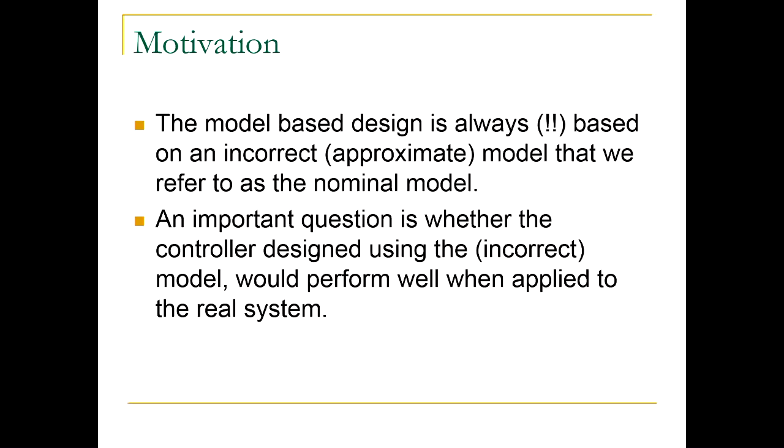The only thing we know is the model, right? So you do the best you can to make the model as good as possible, as high fidelity or as useful as possible. But then your design is solely based on the model. And when you implement it on the true plant, the question is, would it still work? That leads to the question of robustness. How much perturbation in the plant can you cope with before you lose stability? And the other question is, how does perturbation affect your performance? This is a question of robust performance. Both questions are addressed in this lecture.

So here is the general setting that we are dealing with in this lecture. First you have a model. This nominal transfer function is your model, and you design controller C based on the model. But then the question is, how will the same controller perform on the real system? When I use the same controller on the true system, now I have the actual transfer function G. So note that G, the actual transfer function for the true system, is different from the model. Always. You can never expect them to be the same.

I mean, this is still under the assumption that the true system can be described by some transfer function, that the model is linear. But in general, the model is actually non-linear, so there will be even more perturbations, non-linear perturbations, that cannot be captured by just transfer functions. In this lecture, however, we concentrate only on the case when the plant is assumed to be linear, so it can be modeled by some transfer function, and the model is also linear, right?

But more generally, you can pose a question of robustness when the plant is non-linear. We won't address that in this lecture. All right, so the first thing is, how do I model the mismatch between G and G0? You can do it in different ways mathematically, and each different way may have its own advantages in terms of analysis and design.

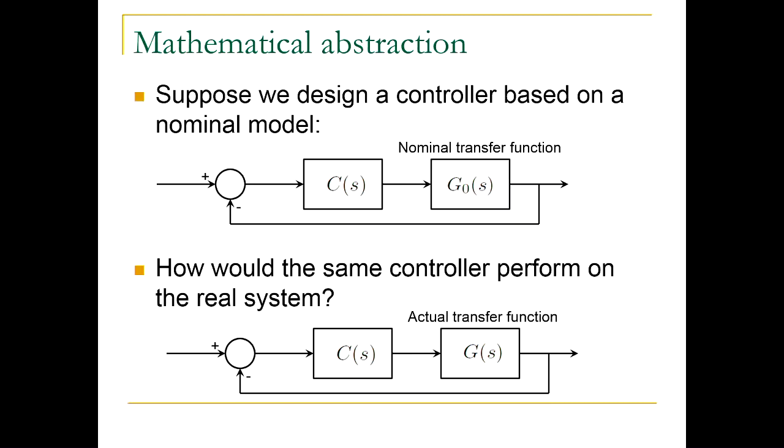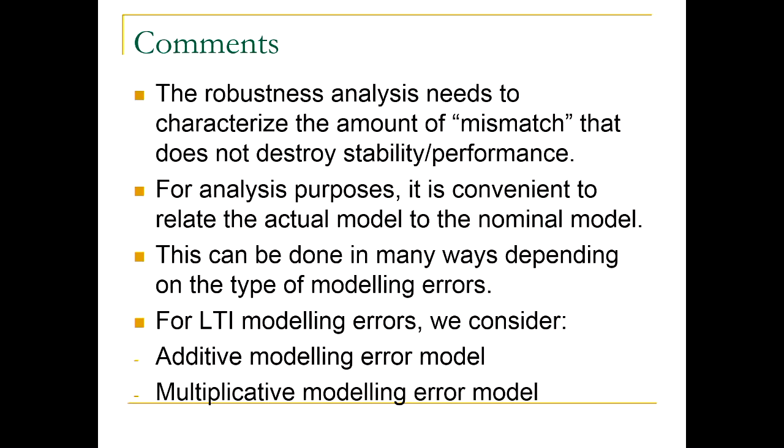So what we want to characterize in robustness analysis is how much different G can be from G0 before it loses the stability properties and performance that we wanted. So we will relate this actual model to the nominal model, and it can be done in different ways depending on the type of modeling errors. For linear time invariant modeling errors, we consider additive and multiplicative modeling error models, and we will go through both. So first, I will present an example.

So when you buy a resistor, you go to a shop and you buy, say, a 100 ohm resistor. But when you read the specifications, the manufacturer would guarantee that resistance is in some range. They would never sell you a resistor which is exactly 100 ohm. What they guarantee is that resistance will be somewhere in the range between 99 and 101.

For instance, it's common to say, well, on average, resistance would be 100 ohms, so I will use 100 ohm as my nominal model for this resistor. But the true model is anywhere between 99 and 101. In other words, the error between the two is plus minus 1 ohm. Now, when you're designing systems, your system might be an electrical circuit that consists of lots of capacitances, resistances, inductances, and each of these elements may have its own errors that you need to cope with.

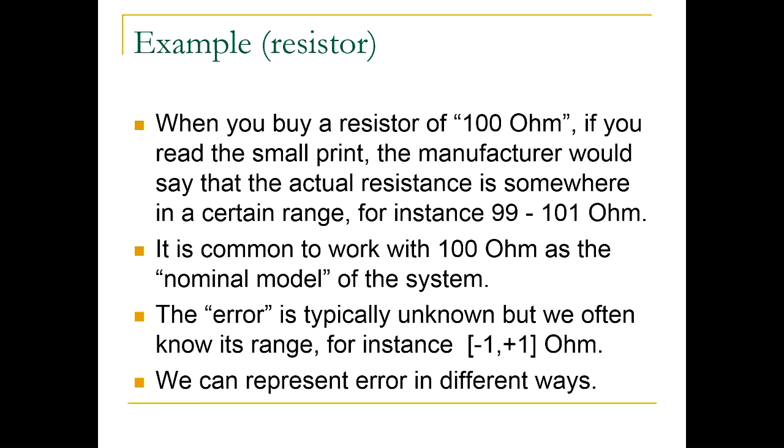So typically you would use the nominal value that the manufacturer tells you, and then you would still need to cope with this uncertainty, which, if the manufacturer is good, they would guarantee, and the errors would be within this range. So now we want to talk about how we represent these errors in different ways. We will present two ways of doing it.

I have a resistor with resistance R, and R0 is the nominal resistance. So think of R0 as 100 ohm, and R is some unknown resistance in this interval between 99 and 101. One simple way to represent it is R = R0 + R epsilon. This is sometimes called the additive error model. Now you may say, well, that's probably enough.

Well, it turns out that in many control analysis and design techniques, it's also useful to represent this error in this way: the true resistance is R0, the nominal resistance, times 1 plus R delta, where R delta is the amount of multiplicative error. It's just a different way of doing it. I presented both the formulas and block diagrams for additive and multiplicative errors for the simple case of resistance.

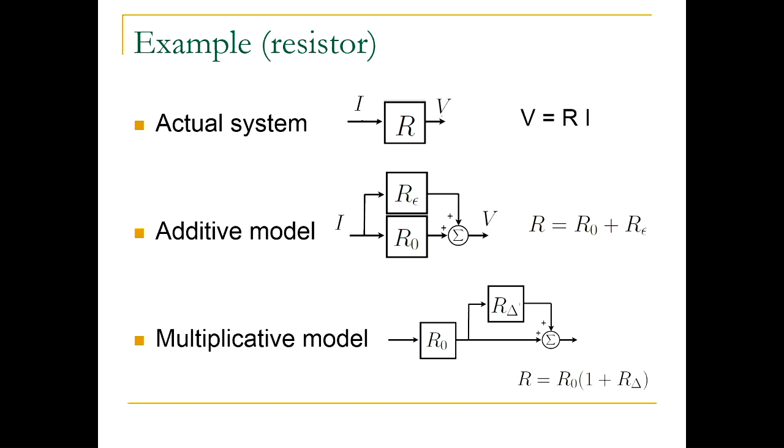But you can generalize the same thing when instead of R, you have a more general transfer function G(s) and G0(s). So R will be G(s) and R0 will be G0(s). You can represent any arbitrary transfer function, not just static models like this one with no dynamics. Then the additive error would be representing the true transfer function G as G0 plus G epsilon. Coming from the resistor example, it's clear where this formula comes from.

And you can also represent it using multiplicative error, where now your true transfer function is G0 times 1 plus G delta, where G delta is the amount of multiplicative error. You may ask, why both? As I said, different techniques might benefit from one or the other.

So we won't actually go into details, but I just want to give you these examples simply so that you are aware of it. It's useful to also consider a couple of relationships. So if you just look at the algebraic equations for G epsilon and G delta, you will see that G epsilon is just G delta times G0, and also in the resistor example, this is easily checked. Right? So there is a relationship between multiplicative error R delta and additive error R epsilon.

We will now go through several examples. What I want to do is present more complicated examples than this. This is very simple because the system is static. But I want to present you examples when you have some transfer functions really, and I will plot Bode diagrams for various transfer functions, in particular G epsilon and G delta, for a range of different examples, just so that you get some intuition behind how general these things can be, right? Depending on the system, these things can become quite general.

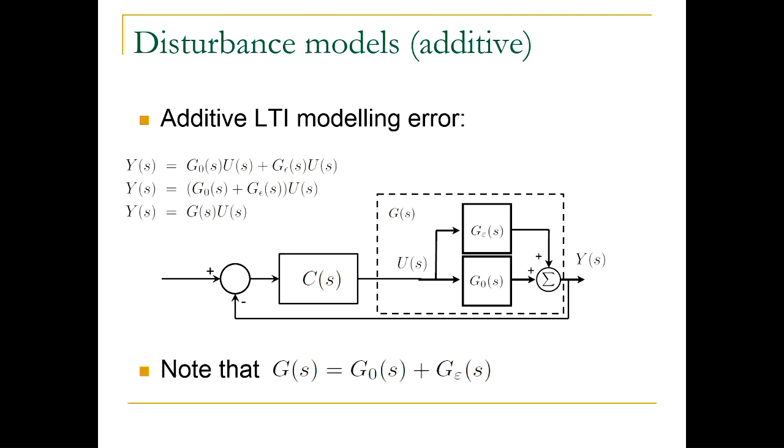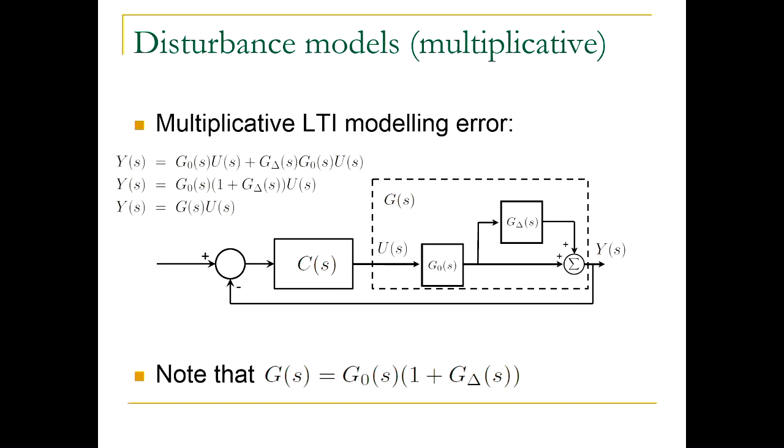You need to basically be able to stabilize the system, right? So the idea is, I just want to go back so that you understand what we are doing here. Suppose I stabilize this system when G delta was 0. Now the question is, when G delta has some of these characteristics, like G delta 1 or G delta 2 magnitude characteristics, would I still be stable? That would be the question we would be asking. And the small gain theorem would answer this question for us.

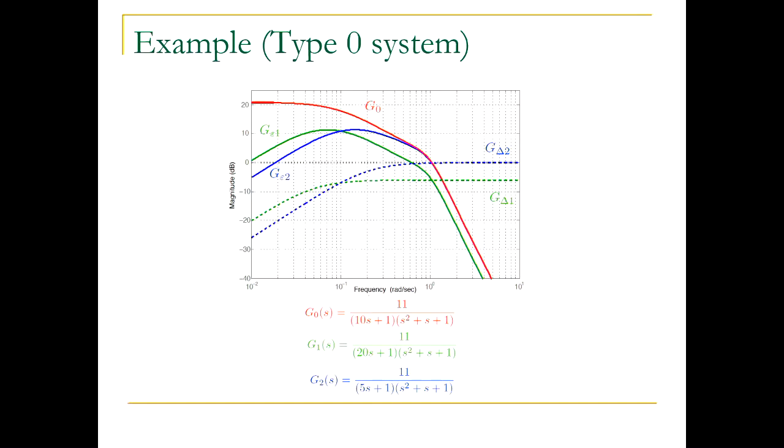Once we present the small gain theorem, you will be able to relate which ones of these can be coped with and which ones cannot be coped with. We cannot conclude if you cannot cope with it. The small gain theorem is a sufficient condition. So if the small gain condition does not hold, you might still have stability, right? But you can definitely pick out the ones that you can cope with.

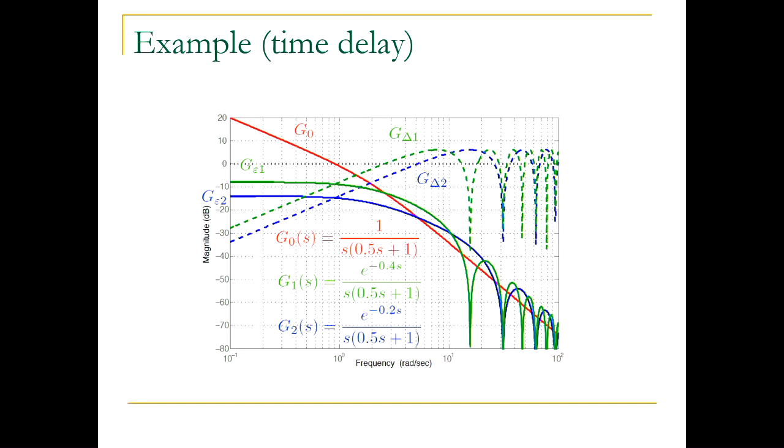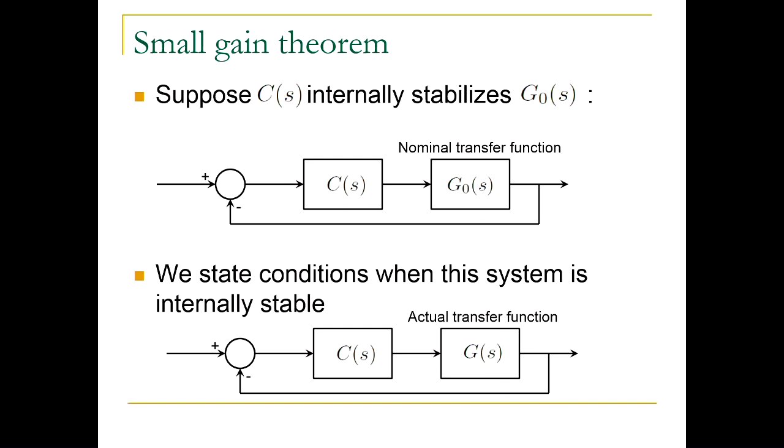What we will assume is that both lambda 0 and lambda have the same number of right half plane poles. So open loop transfer functions have the same number of unstable poles. You can achieve this when either G epsilon or G delta are stable. When they are stable, this condition would hold. Can you see that? What are the poles of G versus G0? Well, this one would have poles which are the union of that one and that one. So if G epsilon is stable, then we are not adding any unstable poles for the plant.

Obviously the controller is the same; the controller doesn't change anything. The only difference in the number of poles can come from the difference in the plant models between G0 and G. So this is an assumption we'll use. Can everyone see this? So if G epsilon is stable, and G0 has a certain number of unstable poles, let's say 5, then if this is stable, this would also have 5 unstable poles.

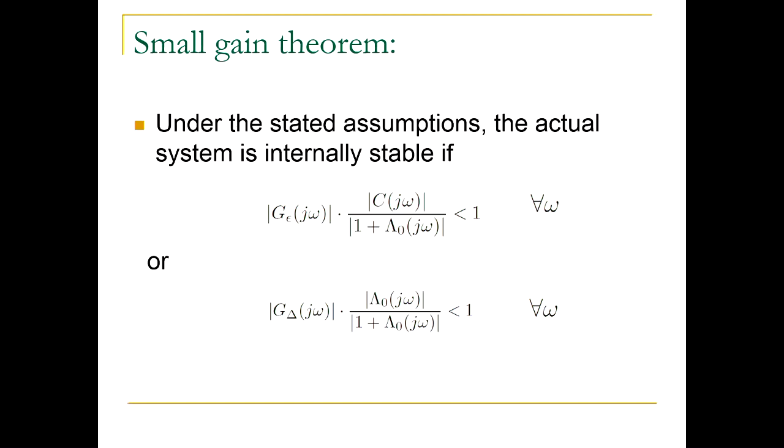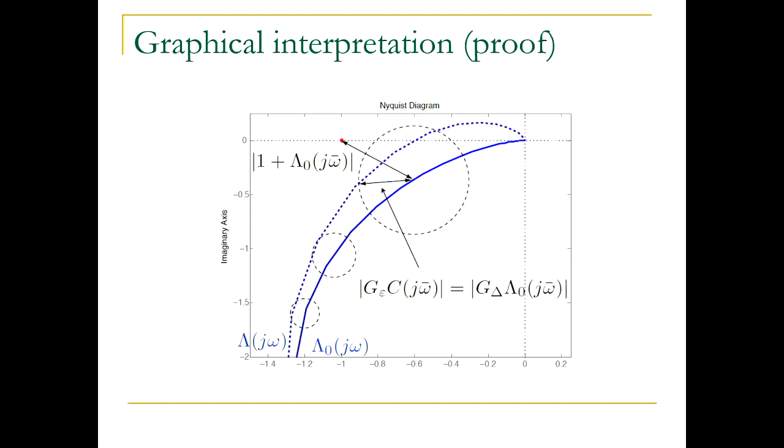So note that here we only use the magnitude information to conclude stability, but in general, phase also affects things. So this is a sufficient condition. Still very powerful, right? So just a few comments which I already mentioned. The small gain condition ensures that the number of encirclements of the critical point (-1, j0) by the nominal Nyquist plot does not change when the Nyquist plot is perturbed by the modeling error. In other words, you have the same number of encirclements for the true system's Nyquist plot and for the nominal system's Nyquist plot. It's only sufficient and potentially conservative.

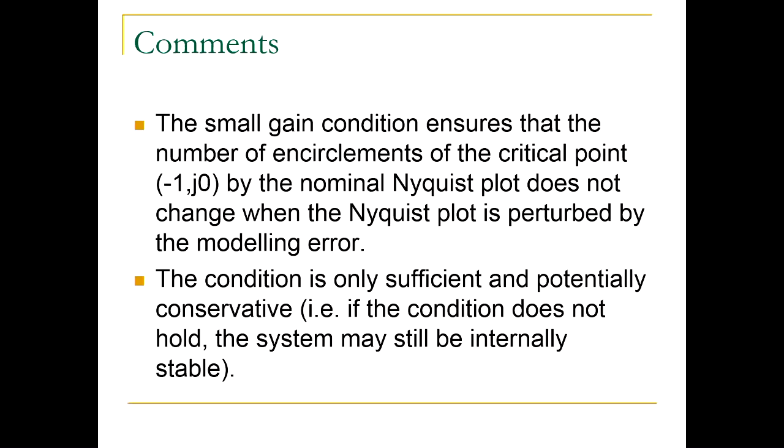If this condition does not hold, the system may still be stable. It is very hard to obtain a better, less conservative condition if you only concentrate on magnitude, without any phase information. So the small gain condition is pretty much as good as you can get just by looking at magnitude. And the results can be extended to unstable perturbations. It's beyond the scope of this subject, so I will just mention that it's not necessary to assume stability; you can deal with instability, but it just complicates things.

All right, so if there are no further questions, I just want to stop, if you want me to go back and explain anything else. No? All right, so let's just go through robustness of performance.

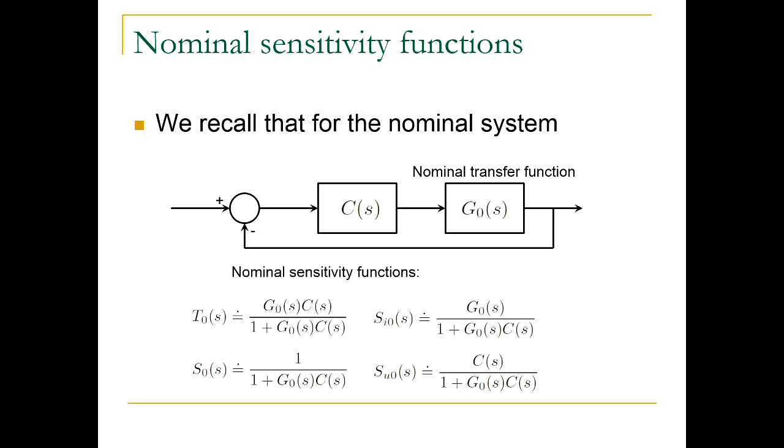So note that one way to capture performance of your system is to require certain properties of these sensitivity functions. Now, if we use a nominal model, nominal transfer function, to design the controller, then we can talk about nominal sensitivity functions. They are all calculated with the nominal model G0. Obviously, when we have some perturbations, the question is, how would this affect the achieved sensitivity transfer functions? So here is the picture now.

When we apply the same controller on the actual system, then we get so-called achieved sensitivity functions. So these are calculated with G instead of G0. So you design a controller trying to get some nice properties of these guys, and then you take the same controller, you plug it into that closed loop, and then you get achieved sensitivity transfer functions. So obviously what we are in the end interested in are the achieved ones, because that's what will determine how your system performs in practice when you implement it.

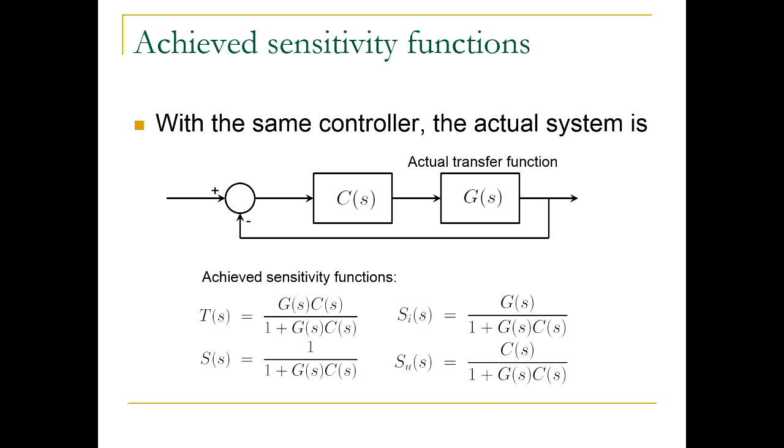So we can rewrite the multiplicative error in this way, and suppose that the controller C(s) achieves these nominal sensitivities. Then you can really do just some algebraic calculations to say, well, achieved sensitivity functions are given here, but now everything depends on this G delta, which is the multiplicative perturbation, but also everything depends on this S sub delta, which is basically a new object.

So if we define this object, which is 1 over 1 plus T0 G delta, T0 is the nominal complementary sensitivity. This is calculated with the nominal controller, sorry, nominal plant model, and G delta is the multiplicative perturbation. So basically, we have these relationships between achieved sensitivities on the left-hand side and the nominal sensitivities on the right-hand side, but the relationship involves multiplicative error G delta and also this error sensitivity S sub delta.

So now, all these formulas are just simple algebraic calculations. You look at what these guys are, and you use the definition of G delta there. Right? So then you can just rewrite algebraically everything in this way. So you can conclude some things. For instance, this is a proof. I won't go through the proof, but steps are really clear so that you can see how you can relate sensitivity to nominal sensitivity.

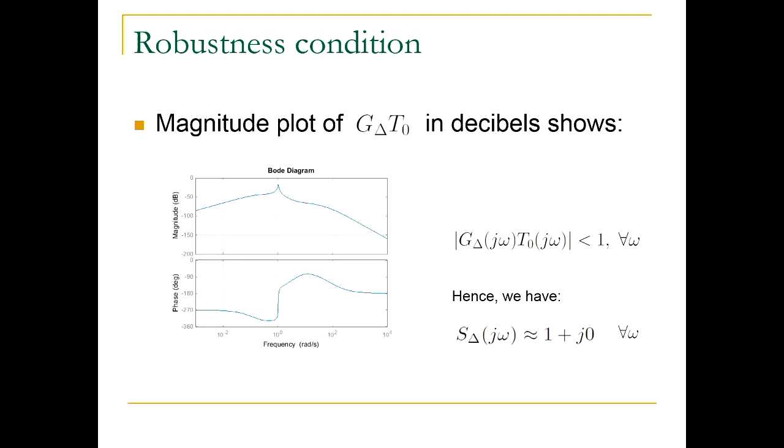You only need to look at the magnitude plot when we talk about this, right? So this is strictly smaller than 1, and this is the sort of thing we were needing to say that achieved sensitivities are similar to the nominal sensitivities. So by the way, why can I plot this? Well, I know my G0 and C, so I know my T0, and also I gave you what G delta is, right, in this case.

Here are the Bode diagrams. So note what's plotted here is quite a lot. So you have lambda 0 given by red, controller is given by black, T0 by blue, G0, the plant, is by this light green or almost yellow, and Si0 is given by the green. So note several things here. First, the complementary sensitivity is close to 1 for a range of frequencies, right?

So what would that mean? It means that we would have good tracking of reference signals in this frequency range, right? Because complementary sensitivity is close to 1. For large frequencies, complementary sensitivity is much smaller than 0. That means that we can reject well the measurement noise. Note that lambda 0 and C have this peak at frequency 10 to the power 0, that's 1. Where does this come from? What do you think?

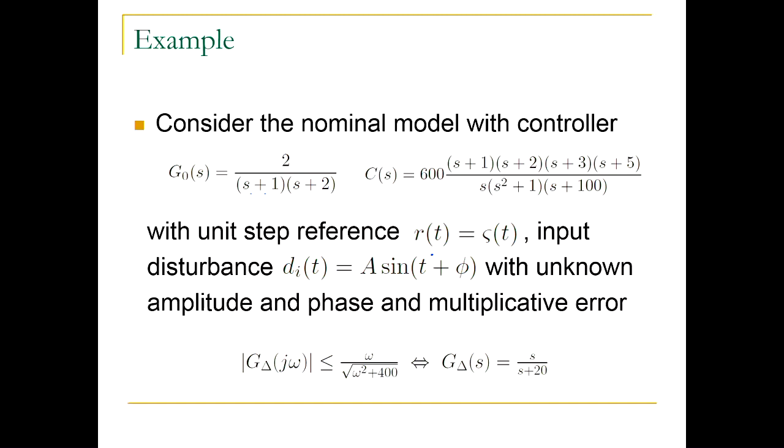So any internal model principle controller that's trying to reject a certain disturbance at a certain frequency would have plots that look exactly like this, with peaks. So lambda 0 has this sort of peak going to infinity, but note what happens with the green plot. Si0 has gain 0 at frequency 1. So this sort of cusp down means actually it's 0. It actually goes to minus infinity in decibels.

So what does this mean? Well, it means that our system rejects this disturbance at that frequency. So the output of the system will not be sensitive at all to that disturbance at that frequency. Right? So these peaks down are a typical consequence of the internal model principle controller structure. Okay? So what else can we see?

Well, from these Bode diagrams, what's happening with the controller magnitude at high frequencies? The controller gain is increasing. Why would that be maybe undesirable? Well, you would typically have some noise hitting you somewhere, right? So if the controller is affected by that noise, then there will be high gain, because the controller will be producing large control signals to cope with these high frequency signals. But high magnitudes of control signals may saturate your actuators.

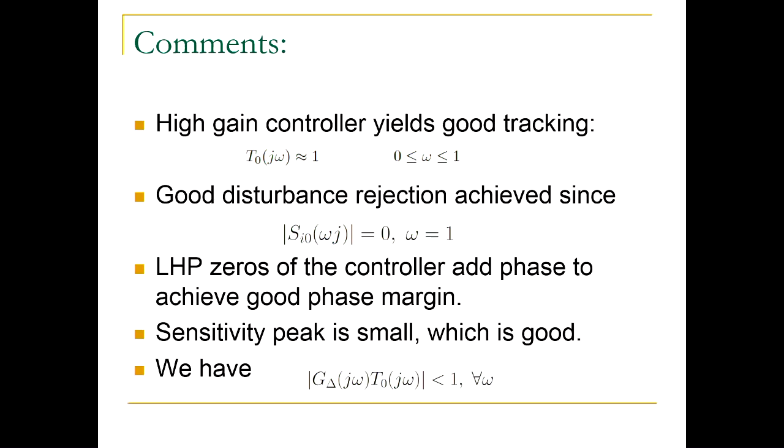So what else? Sensitivity peak is small, which is good. Look at the sensitivity function. There aren't too many big peaks going above 0, right? That's good. And then also when we look at the G delta that we were given, times T0, that magnitude is smaller than 1 for all frequencies. And this is also good in order to have good robust performance. So achieved sensitivities will be close to the nominal sensitivities.

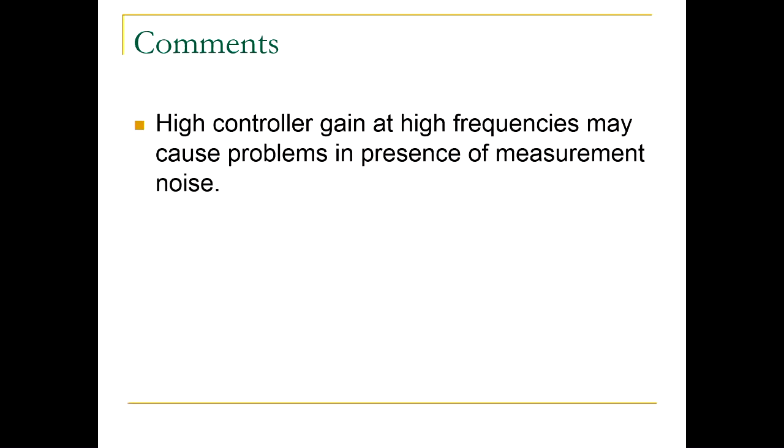And I already said that high gain control might lead to saturations, and that's undesirable in general. So look, this is the toolbox that you have at your disposal. When you design your controllers using the tools from this subject, in the end you need to plot your sensitivities and analyze them in the way we just did, so that you check whether your design has any drawbacks, right? And whether you achieved all the performance specs.

This example was not given in a way where I said, design a controller. I gave you the controller, which was designed, and we were just analyzing how you would assess the performance of that controller at the very end. This would be the last step in the design, right? So you plot all of these functions, and then you say, okay, are there any culprits, are there any suspicious gain plots? Based on everything we've learned, you need to now apply to these plots and analyze them and understand them.

If you had, let's say, some sensitivity peaks, if this green went way above 0, you might need to deal with that, right? Because that would mean that the system might amplify some input disturbances at a certain range of frequencies. Whether you would need to deal with it or not depends on your application. If in your application you genuinely do not expect disturbances in this frequency range, then you forget about it. But if you can have disturbances in that frequency range, then you have to go back and do something about it. So this step will be the final step.

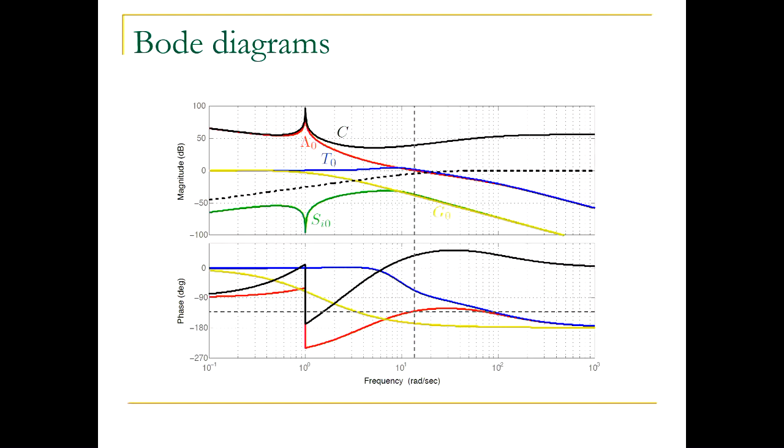So, all right, what we did today, we considered robustness to modeling errors, and we saw that we can represent these modeling errors in different ways, and we presented the small gain theorem, which is a theorem for ensuring stability under some perturbations. If perturbations satisfy some inequality, you will still have stability for the actual closed-loop system. And we also presented some conditions that guarantee robust performance. So small mismatch between nominal sensitivity transfer functions and achieved sensitivity transfer functions. Okay, as I said, this is the hardest part of the whole subject.